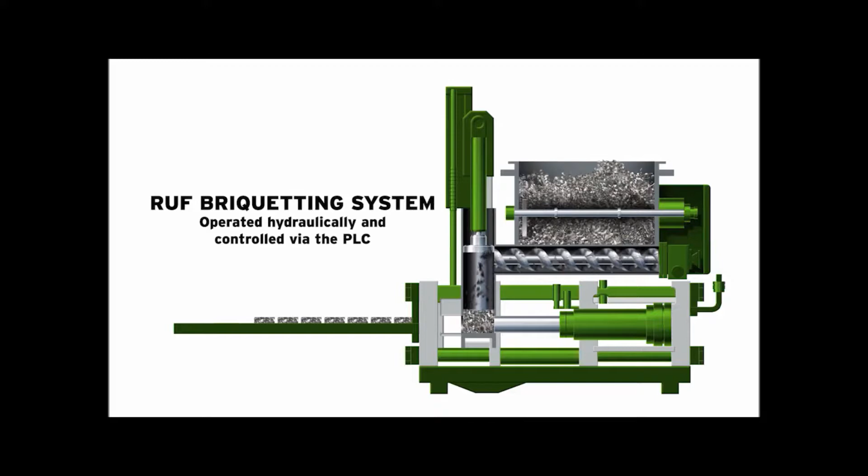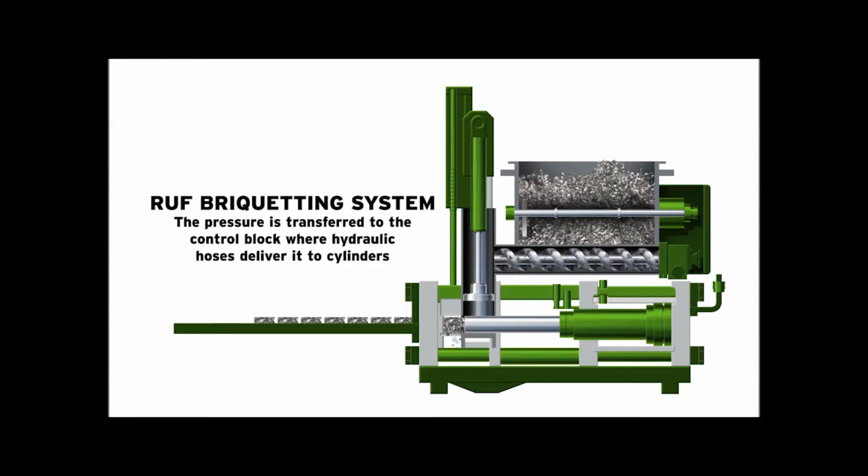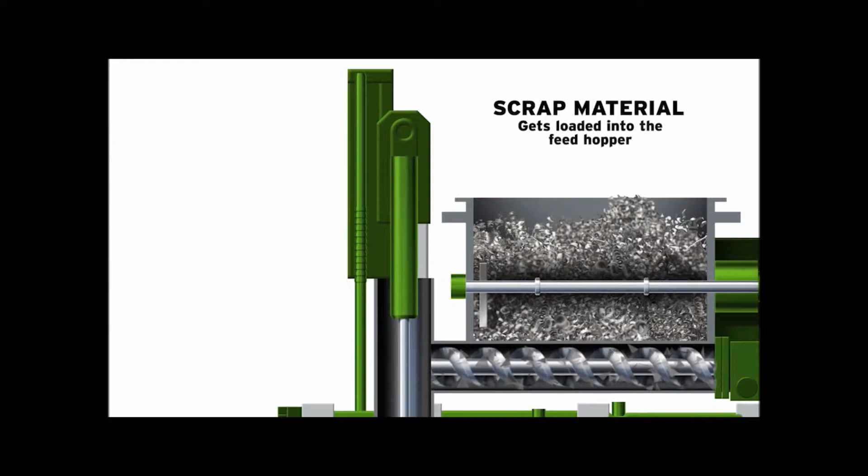A hydraulic pump is driven by the hydraulic drive motor and produces the required pressure. This pressure is transferred to the control block, and then the hydraulic hoses deliver it to the cylinders. The hydraulic oil is stored in the hydraulic oil tank, cleaned via the filters, and kept at operating temperature through the hydraulic oil cooler.

The process of transforming metal scrap materials into compressed briquettes begins when scrap material is loaded in the feed hopper. The screw conveyor in the hopper carries the material to the pre-compression chamber. The running time of the screw conveyor is calculated every cycle and controlled by the PLC to ensure a good quality briquette is made every cycle. The screw time will adjust if the particle size or density of the scrap material changes.

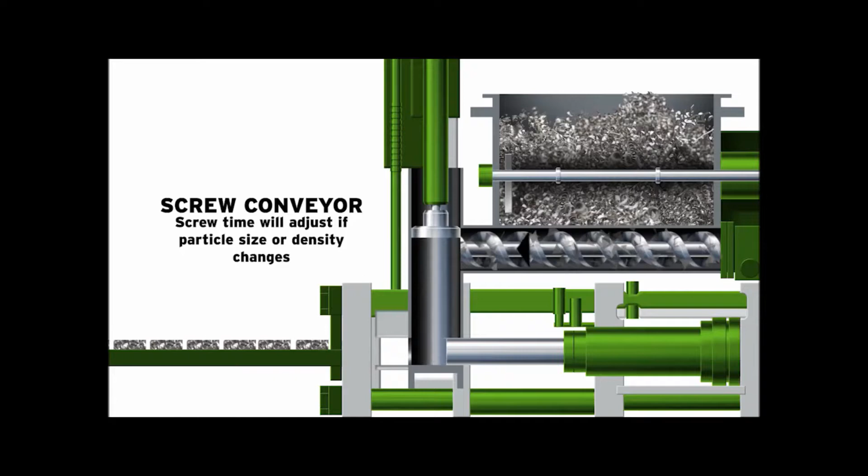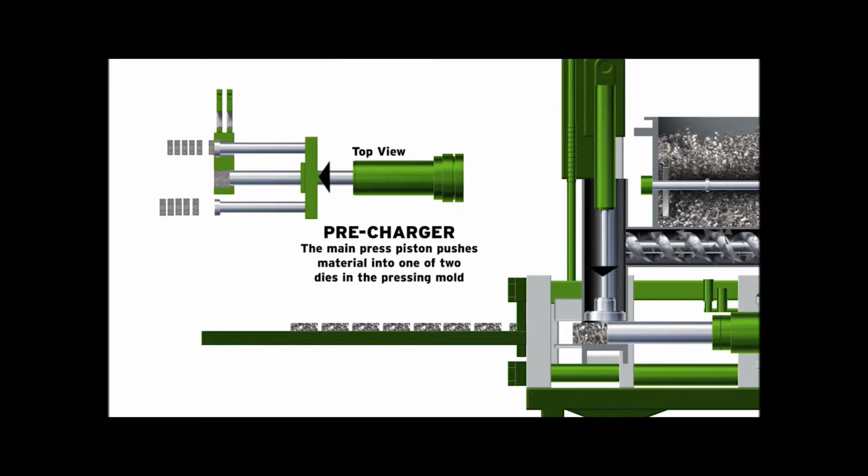Once the screw conveyor fills the chamber, the pre-charger pre-compresses the material into the pressing chamber. Then the main press piston pushes the material into one of the two dies in the pressing mold. This is where compression continues and the material is formed into a dense block. Pressures are monitored and compression continues until reaching a preset value.

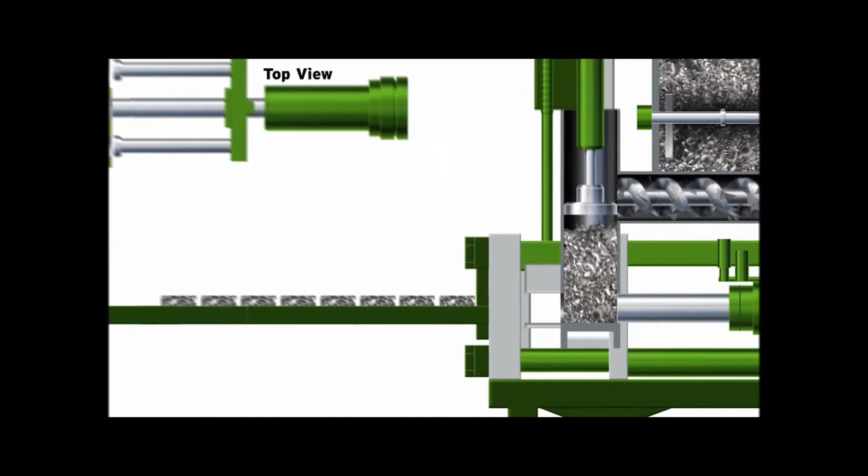As the press piston compresses the material into a dense block, excess coolant is squeezed from the scrap material and is collected in the catch basin beneath the briquetter. Once the excess coolant reaches a predetermined fill level, a pump is triggered to dispense it out of the basin and into another container, such as a filtration unit, for reuse.

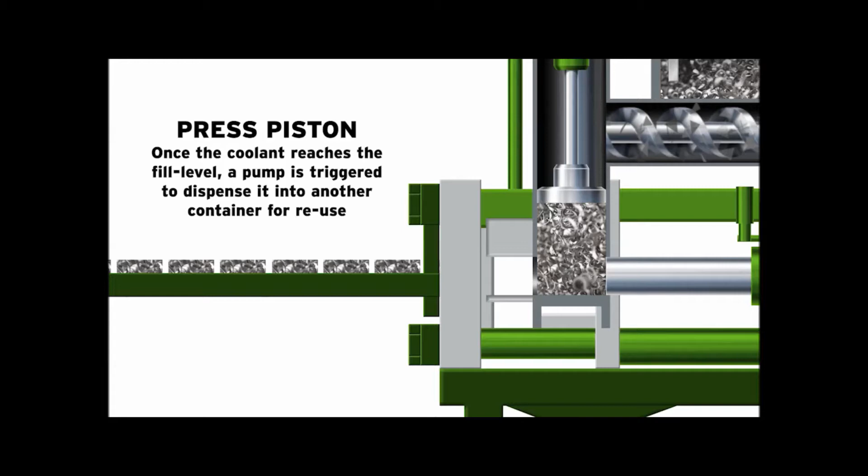During this compression process, the ejectors, which are fixed parallel to the main press piston on either side, push the briquette from the previous cycle out through the ejector holes in the front plate. This process dispenses one briquette per cycle and alternates when the new compressed briquette is complete.

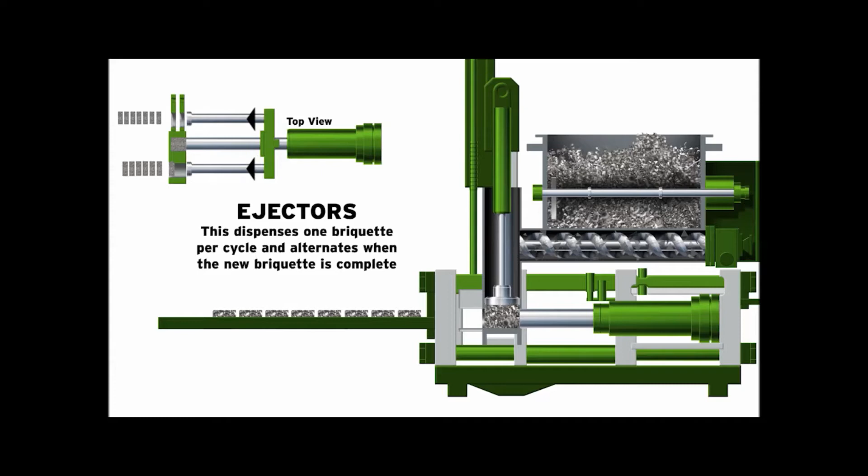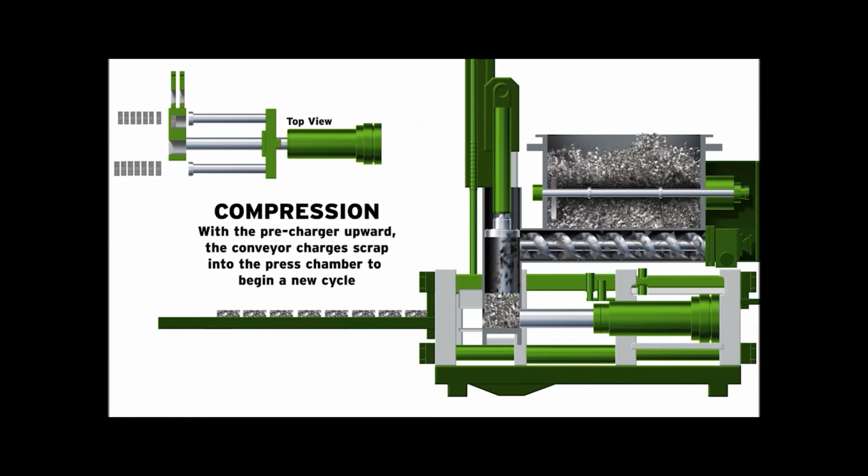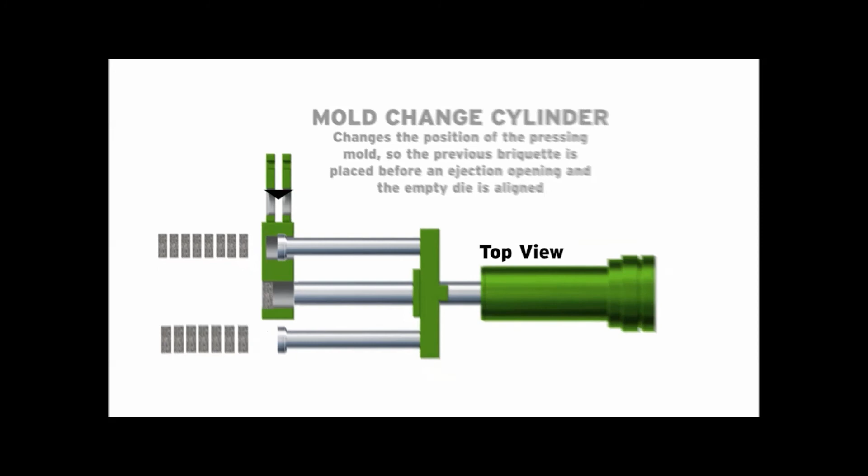The main piston and pre-charger then return to their home positions. With the pre-charger upward again, the screw conveyor charges scrap metal into the press chamber once more to begin a new cycle. The mold change cylinder changes the position of the pressing mold so that the previous briquette is placed before an ejection opening and the empty die is aligned with the press piston. This process continues until the scrap material in the feed hopper has been depleted.